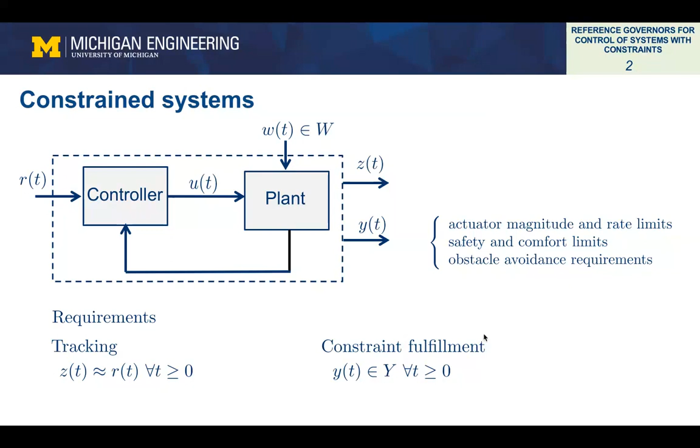Now, from the application standpoint, the importance of effectively dealing with constraints is increasing. This happens for a number of reasons. First, many systems are downsized. For instance, recent trends have been that engine displacement volume in passenger cars has been decreasing. And there is also a larger number of missions currently involving smaller satellites, such as CubeSats.

Such downsized systems tend to operate closer to constraint boundaries and are more likely to violate constraints. Moreover, existing systems are increasingly pushed towards performance limits, so the same situation emerges.

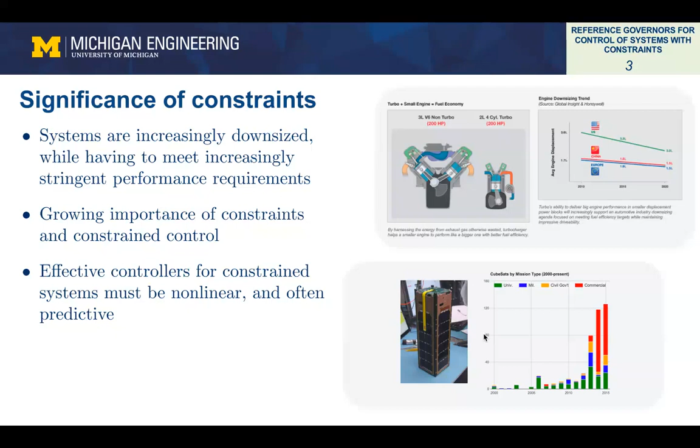To deal with constraints, effective controllers must be nonlinear and often predictive. In fact, a popular and effective technique for dealing with constraints involves the use of model predictive control. In MPC, you generate a feedback law by taking the first move of the optimal control sequence obtained as a solution to a constrained optimal control problem.

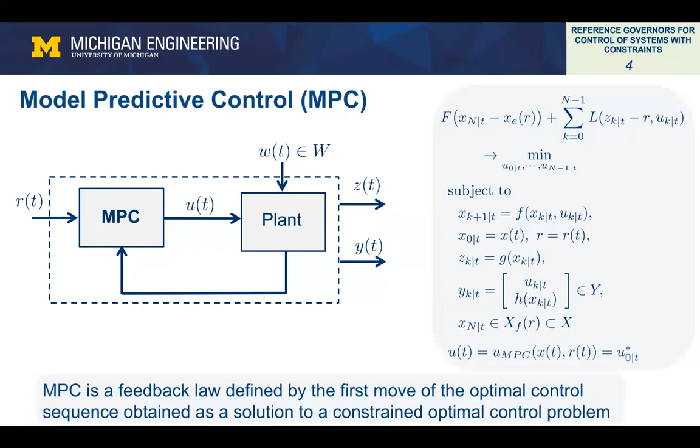The type of MPC problem you might pose is given here on a slide. And if you formulate it in an appropriate way, for example with terminal set constraints, you can guarantee that constraints will be satisfied for future times if they are satisfied at time 0.

Now here's a different type of situation where you already have a nominal controller designed, which provides satisfactory performance and does everything you want except handling the constraints. In such a case, you may not want to replace this nominal controller by an MPC controller, but you might augment it in some way to help it cope with constraint violations.

One such scheme for augmenting the nominal controller is the reference governor. What the reference governor does is look at a command provided to the system, and modifies it if necessary to avoid constraint violation. So this device remains inactive: the output of the reference governor, V of t, is equal to the set point if there is no danger of constraint violation. And if there is a danger of constraint violation, it will try to minimally modify the command that is fed to the nominally designed closed-loop system.

One property such schemes should have is that they should be easy to implement and have a fairly low computational footprint.

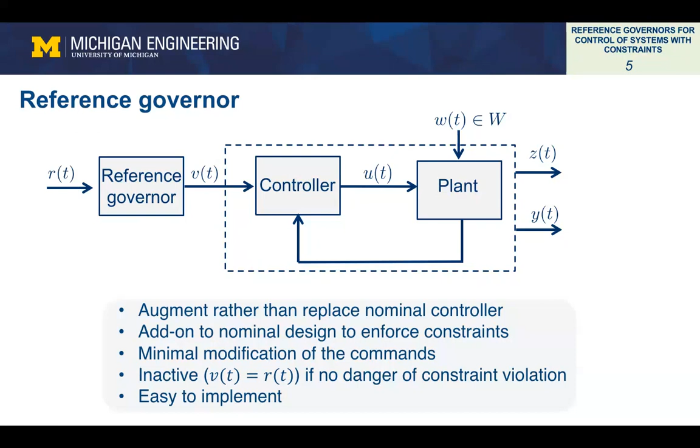Before I describe how we construct reference governors, let me show by example what they actually do. This is an example of a double integrator converted to discrete time, with constraints on position, velocity, and acceleration, which is the control input in this case. The nominal controller is of proportional plus derivative type.

If you now replace the command by the output of the reference governor, and as we will see shortly, the reference governor is a feedback law that depends on the previous value of its output and on the state, then this is what happens.

The step command, which goes to 0.5, is replaced by a gradually changing command. This dashed black line is the output of the reference governor, and it builds up slowly towards the reference. The effect it has on the system is that it slows down the system response, as shown by the blue solid line, as compared to the red dotted line, which is the original response without the reference governor. But as an outcome of this slowdown, the constraints on velocity and on the control input are strictly enforced.

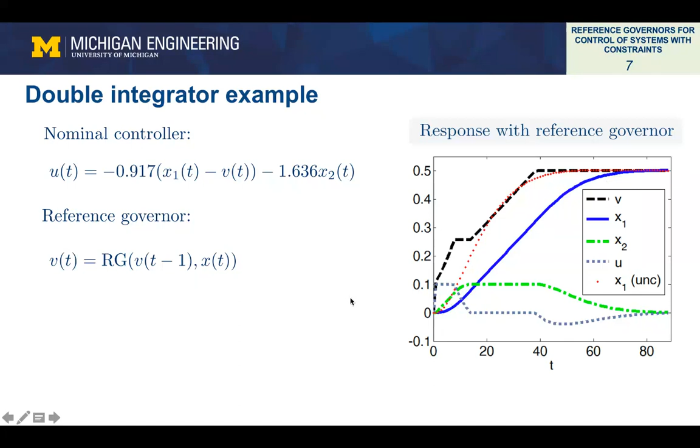Here's another, a little more complicated example. This is a single degree of freedom spacecraft with a flexible appendage, and we are interested in changing the orientation of the spacecraft without causing too large deflections of the appendage. The constraints here are on appendage deflection, basically the modal coordinate of the first mode, as well as on actuation input. The nominal control here is proportional plus derivative feedback on the orientation.

Now here's the response with the reference governor. What you can see is that the reference governor changes the steps to the dashed red lines, so the command is slowed down and constraints are strictly enforced. As you can see, the amount of slowdown depends basically on the reference size—for larger references, we have to slow down the reference more to be able to cope with constraints.

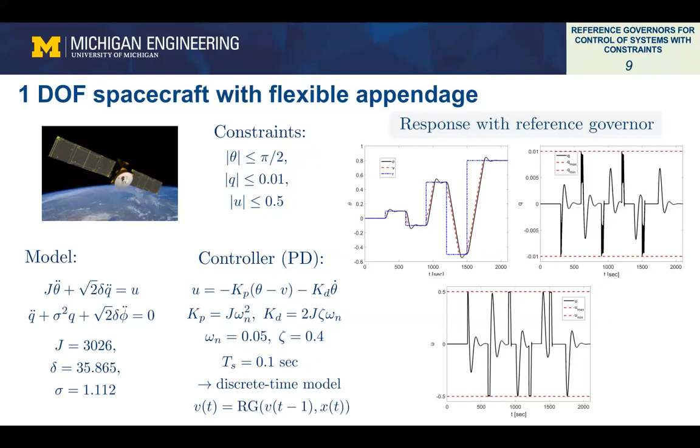Okay, so now as you can see what the reference governor does, the question is how does it do it? The basic idea is fairly simple: you compute the reference command, or modified reference command, so that if constantly applied, it would not lead to constraint violation.

Here's an example of a system with a static gain of 1, to which we apply a step input command. The constraint here is chosen so that the set point is exactly on the constraint boundary. As you can see, the output tracks the set point, but because of the overshoot, it violates the imposed constraint. So what the reference governor might do is scale down this reference and apply a smaller command, just enough to avoid violating the constraint due to the overshoot.

Now, this satisfies constraints, but of course it does not reach our target set point. So what happens is that at a future time instant - you can implement the reference governor in discrete time, so this corresponds to a future sampling time instant - you look at your current state and find a way to advance the reference a little bit more towards your original command without violating the imposed constraint. You repeat this process at future time instants, gradually building up the reference towards your original command without violating constraints. So this is the basic idea.

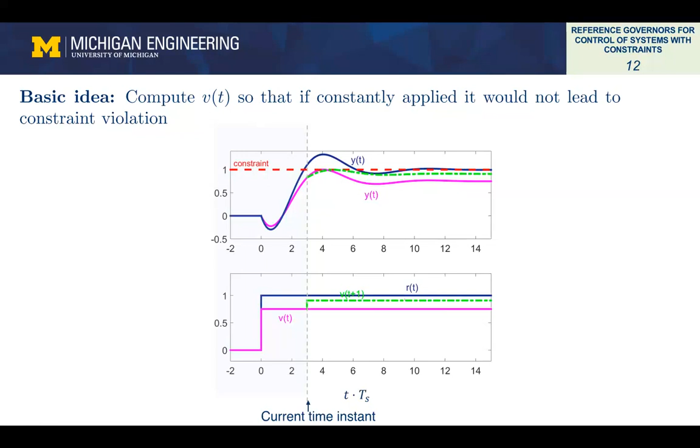Now how do we do this a little bit more formally, and how does it look in terms of equations? The key artifact in constructing the reference governor is the safe set. The safe set can be defined for continuous time systems, it can also be defined for discrete time systems, and it can be defined for systems that are linear or nonlinear. Here is an example where we define the safe set for a nonlinear discrete time system.

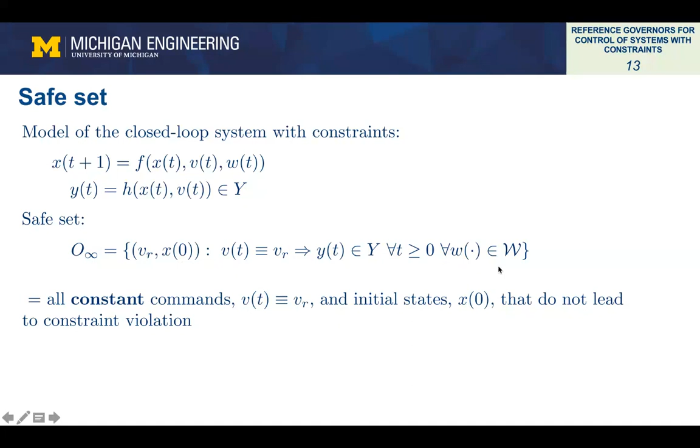It's really the set of all constant commands and initial states such that if we apply the command and start with this initial state, the subsequent response, the output, satisfies the constraints for all future times. And if your system happens to have parametric uncertainties and disturbances, then this property must hold for all parameter uncertainties and disturbances, also satisfying suitable conditions.

All right, so here's how the simplest so-called scalar reference governor is defined. It's defined by the solution of an optimization problem where you try to maximize kappa, subject to a couple of constraints. You can view the reference governor as given by this equation in two ways.

You can view it as a linear filter with an adjustable bandwidth parameter kappa, where kappa is between 0 and 1. You can also view it as an interpolation between the previous value of the output, v of t minus 1, and the current value of the command. So if kappa equals 1, then v of t equals r of t, and you pass the command to the system unfiltered. And if kappa equals 0, then the reference governor holds its output at a constant value, which is essentially an extreme constraint-avoiding action.

So what you try to do is choose this kappa as large as possible, so that v of t is as close as possible to r of t, subject to the constraint that kappa is between 0 and 1, and the pair consisting of updated command v of t and x of t is safe. By safety here, we require that it belongs to a set P, and that set P is a subset of O infinity.

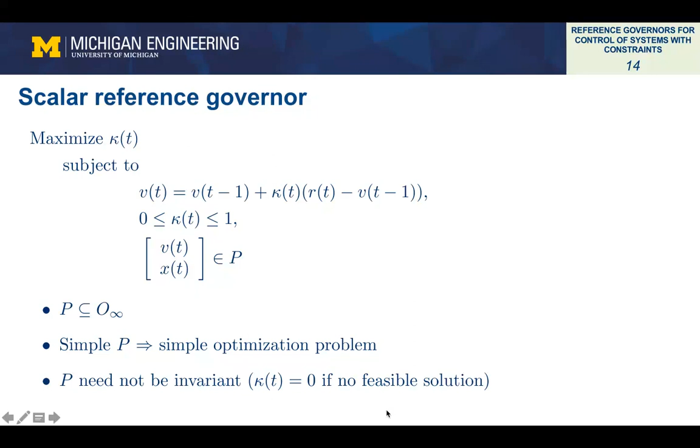So how do you obtain P? There are a number of offline procedures available. In the simplest case, if your model happens to be linear and constraints happen to be affine, then the set P is typically a polytope, and it's something that's fairly easy to compute.

Additionally, there are various procedures available for redundant and almost redundant constraint elimination that allow you to systematically simplify representation for this set P and lower computational complexity of the reference governor.

Now, if you happen to work with a nonlinear system, or with a linear system, and you have a Lyapunov function or ISS Lyapunov function for the closed-loop system, then you can use constraint admissible sublevel sets of such functions for your set P and for your reference governor implementation.

Next, if you happen to have a simulation model or experimental system, the only thing you can basically do is simulate or run an experiment, and you can do this for different commands and for different initial conditions. Then you can apply machine learning techniques to find a classifier that separates safe pairs of commands and initial conditions from unsafe pairs, and you can use a sublevel set of that classifier for your set P.

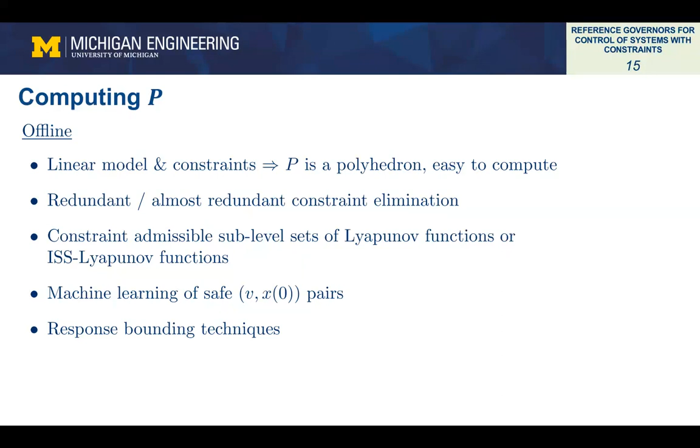Let me talk in a little bit more concrete detail about the simplest case, what happens when the model is linear and also the constraints are affine in the output. In this particular case, we are going to assume that the matrix A is Schur, so the system is stable, which is a reasonable assumption since typically the reference governor is applied to closed-loop systems.

Now, for such a system, it's very easy to predict the output response. Essentially, it's given by this compact expression. This is a state transition formula for linear systems adapted to the case when the command is constant, so it's just equal to v for all times.

What we can do now is define the set O-infinity-tilde as the set of all pairs of commands and initial states that satisfy these inequality conditions. Let me explain what they are.

If you go by row, this corresponds to the requirement that the output of the system satisfies the constraint. So the first row corresponds to the output at time 0. The second row corresponds to output at time 1. And you go all the way to a certain horizon T star. The last row is interesting because this is a requirement that the steady-state value of the output, that is the value at infinity, satisfies the constraints, and it has to satisfy the constraints strictly.

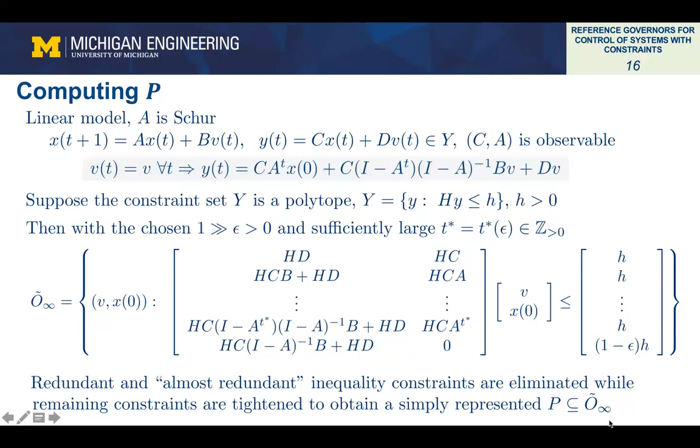Once you obtain O-infinity-tilde, you can eliminate redundant and almost redundant inequality constraints, while remaining constraints can be tightened to obtain a simply represented subset P of O-infinity-tilde that you can use in the implementation of the reference governor.

This is how O-infinity-tilde looks for our first double integrator example. The full set is three-dimensional, and what I show here are cross sections of the set by a constant V plane. So the meaning, for example, of the magenta set is that if I start anywhere in this set and apply a command of -0.5, then the ensuing trajectory will satisfy the constraints.

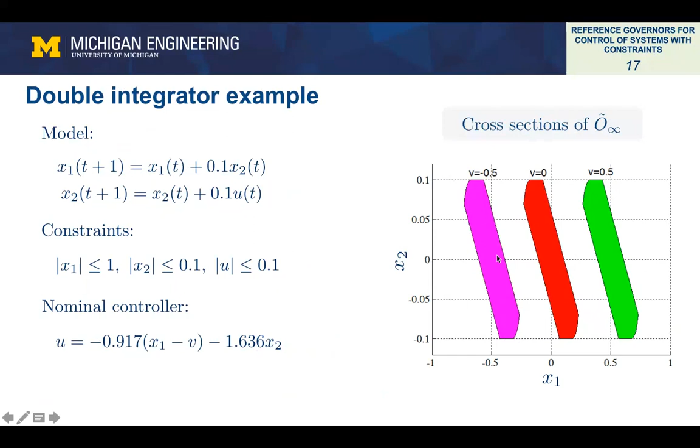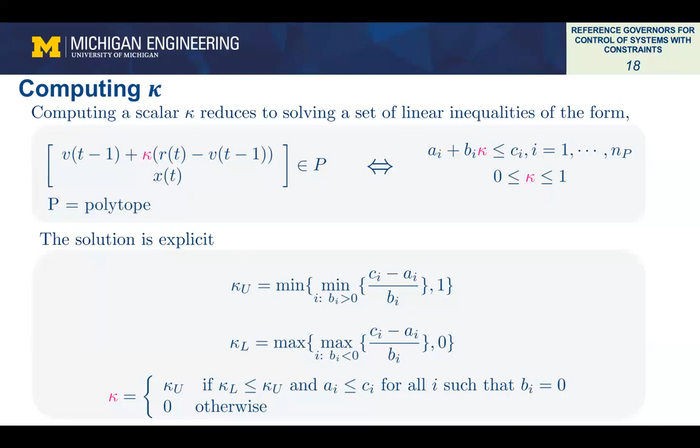So in the case when the set P is a polytope, the computation of kappa as a scalar parameter is very simple because essentially it reduces to solving a system of linear inequalities, and kappa is a scalar parameter between 0 and 1. It has to satisfy the family of these linear inequalities, and the solution of this is trivial. In fact, in most cases, kappa is equal to kappa-u, which is given by this explicit formula. So you can estimate, for example, the number of flops such computations can take, and the implementation of this can be done in a very simple way.

Now, this slide illustrates the impact of almost redundant constraint elimination on the computational complexity. This example is for a practical system. It's a fuel cell with about 10 states. So O infinity tilde here is in 11-dimensional space.

Here's what we do when we eliminate almost redundant constraints. If you look at O infinity tilde, shown here by the solid black line, what we often find is that many faces are very similar, so the normals are pretty much close to being the same. In such a case, we can eliminate some of the inequalities in the definition of O infinity tilde that are almost redundant, and by doing so, we obtain a slightly larger set, shown here by the magenta dashed line.

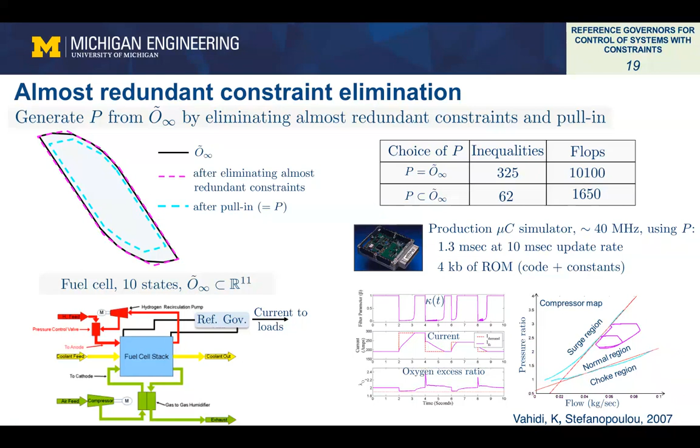What we can do next is pull in this magenta set to get a light blue set, which is strictly inside O infinity tilde. After this pull-in, we can use the resulting set as our P in implementation of the reference governor. As experience with several case studies shows, including for the fuel cell, the number of flops at each time step that you need to use can be reduced by an order of magnitude, with reasonable degradation in performance of the reference governor.

Okay, so this begs the question: how general can the sets P be used in a reference governor implementation, especially if you start looking also at nonlinear systems? It turns out the sets can be quite general. They basically have to satisfy two properties: the first property is safety, and the second property is strong returnability.

Safety means that if you start in a set, then the ensuing trajectories will satisfy the constraints for all future times. The property of strong returnability means that trajectories that start in a set may leave the set, but they must eventually enter the interior of the set. So we do not require the invariance of such sets, but we do require strong returnability of the sets.

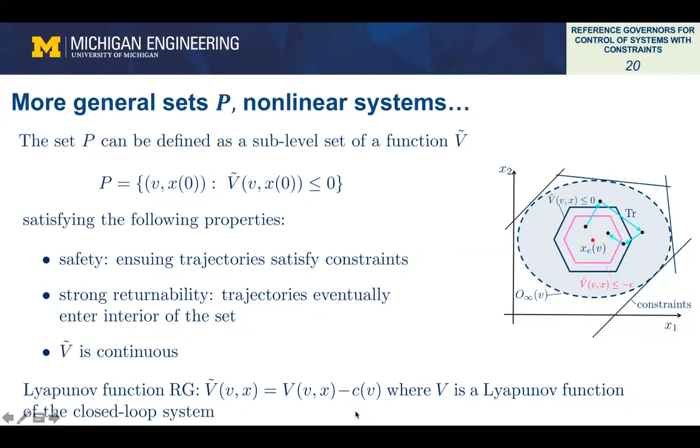It's also helpful when the set P can be written as a sub-level set of a certain function V tilde, which is continuous. You can certainly do this in the case when the set P is a polytope, and in other cases, for instance when you have a Lyapunov function, an easy way to generate this function V tilde is to essentially scale it by an appropriate amount so that it fits inside O infinity.

This is the reference governor that uses a functional description of the set P in terms of this function V tilde. Again, it's a scalar optimization problem that you have to solve, subject to the constraint that kappa is between 0 and 1, and that this function V tilde has to be less than or equal to 0. In some cases, the solution would be explicit. In other cases, you might have to do bisections on kappa to find the kappa that solves this optimization problem.

Now, for a number of technical reasons, there is a small modification that's needed. That is, you accept small increments in the reference governor output only if V tilde is less than or equal to minus epsilon. This is a technical condition, and it guarantees finite time convergence to constant steady-state admissible references that I'll talk about next. But it's needed for that reason.

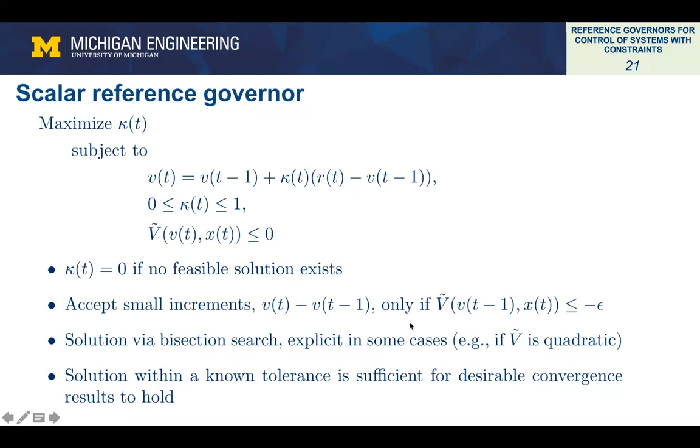Now, what if you don't want to compute this set P and you still want to implement the reference governor? Well, it turns out that you can implement it without computing P explicitly. What you can do instead is use online prediction over a sufficiently long horizon to determine if a given command and state pair is safe.

The advantage of this online approach is that the reference governor would be reconfigurable to model and constraint changes. So if your model changes online, you just use the new model for prediction. The drawback of this approach is that the constraint reduction techniques I have mentioned are not straightforward to use. Of course, it's possible to combine offline and online approaches together, that is, to pre-compute P or O infinity for part of the constraints, and then use simulations for the other part of the constraints that, for example, may be changing dynamically.

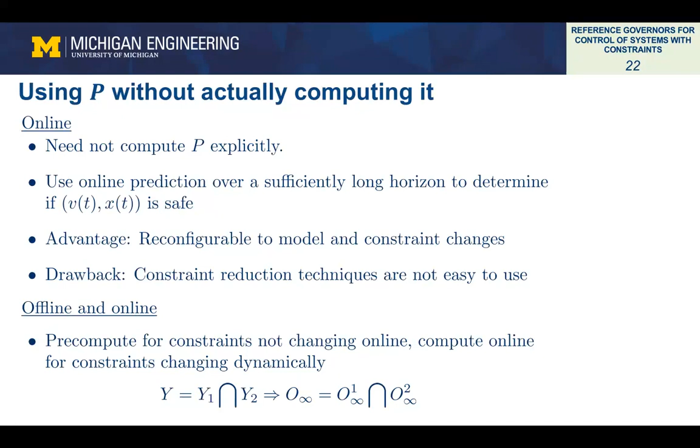Let me show some of the details for the response prediction based reference governor. Again, the ideas are simplest and the computations are easiest when the model is linear, because for a linear model, predicting the response to a constant command is pretty simple, given by the state transition formula adapted to the case of a constant command, and you can write it essentially as a linear function in kappa.

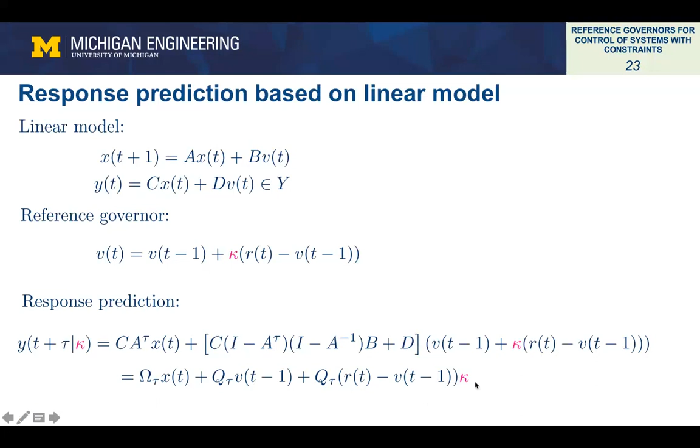This is an algorithm that applies to linear models, and constraints do not necessarily have to be linear in this case. They can be nonlinear, provided that the set Y is convex.

What you basically do is that at each time instant, you set kappa equal to 1, and tau here is the running time over the prediction horizon. You march along the prediction horizon and check whether the constraints are satisfied. If the constraints hold, you keep marching on.

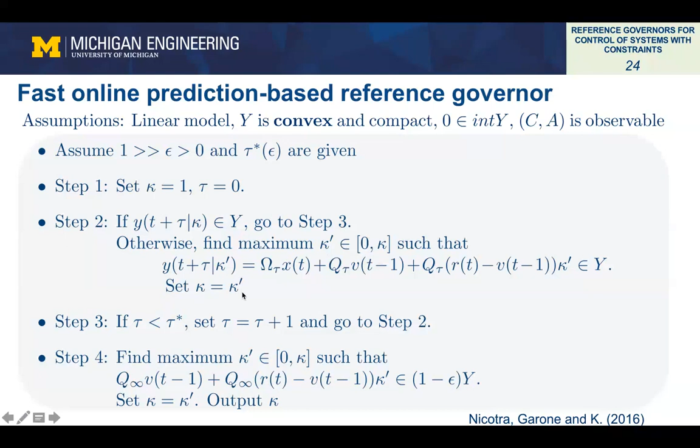If at some time instant you find that the constraint is violated, then you tighten kappa, so you find kappa prime in the interval between 0 and kappa, such that the constraints hold. Then you assign kappa equal to kappa prime, and continue this process till you reach the end of your prediction horizon. In typical case studies, the number of these kappa tightening steps, that is, where you do something else rather than just checking constraints, is actually very small over the prediction horizon.

This is an example of spacecraft relative motion control where constraints happen to be quadratic and linear. They are convex. As we control the motion of the spacecraft, on average we do two times of tightening kappa. At maximum, we do six times when the prediction horizon is equal to 50 steps here. So it's an effective approach.

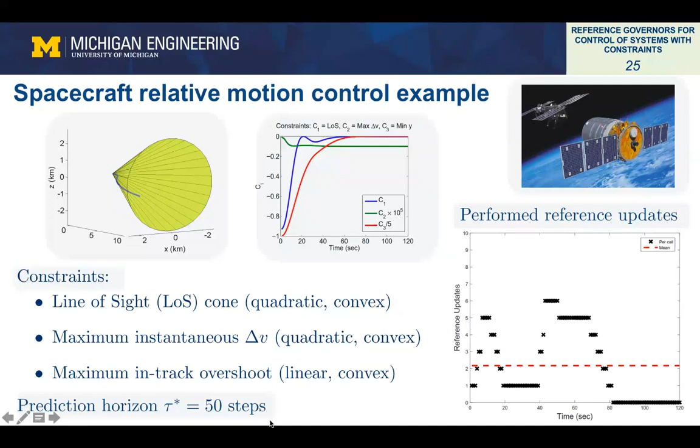Now that I've given you a flavor of how a reference governor is constructed and how it's functioning, let me tell you a little bit about existing theory, which summarizes several theoretical results available in the literature.

First, linear and nonlinear systems with set bounded disturbances and parameter uncertainties can be treated. Feasibility at initial time implies constraint adherence for all future times. This is a recursive feasibility property similar to the one in model predictive control.

The other property is the finite time convergence of the reference governor output to the command, or to the nearest steady state feasible value, provided that the command is constant. So for constant commands, we converge in finite time. It turns out that similar convergence results can be shown for nearly constant and slowly varying commands under suitable assumptions.

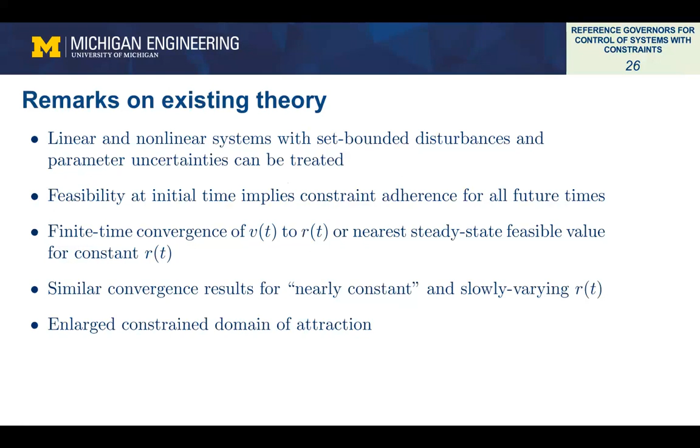Finally, such schemes provide an enlarged constrained domain of attraction compared, for instance, to feeding the command to the closed loop system directly.

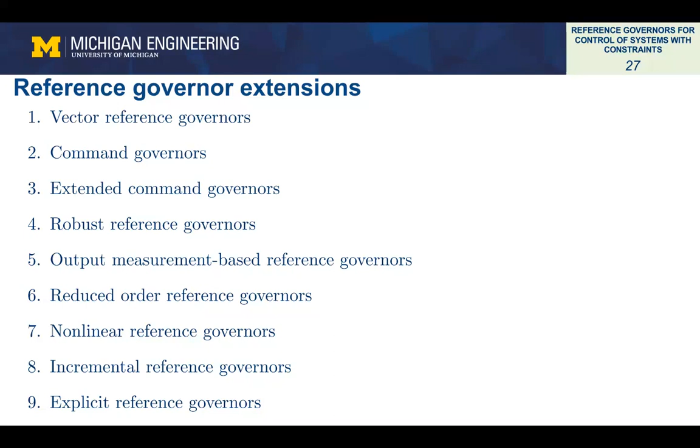Explicit reference governors are a very nice idea which do not use optimization at all. But they essentially use a feedback law design in continuous time, and by doing so, they guarantee traditional properties of the reference governors.

You can develop explicit reference governors for time delay systems. Reference governors can also be applied to systems where the delay may be random or there are data drops, and this is the case for network systems control over networks.

With some modifications, you can design reference governors for enforcing time-varying constraints. There is also a way to do distributed reference governors.

Inner loop reference governors use ideas from passivity in order to be able to place the reference governor not outside of the nominal feedback loop, but actually inside the feedback loop, and that sometimes is useful in applications.

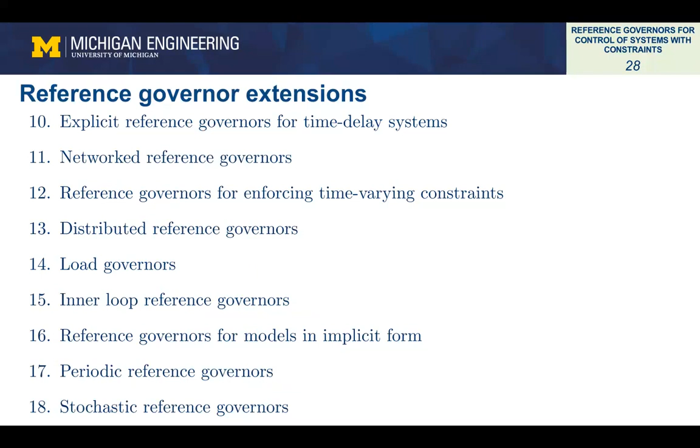You can design reference governors for models in implicit form, for periodic systems, and also for some classes of stochastic systems.

Those are reference governors, and why stop on just modifying the references? With the same idea of augmenting but not replacing, you can try to govern other parameters in the closed loop system, for example, gains of the controller, and that's what parameter governors do. Virtual state governors control the state in reference governors. They also reset the states, and it's also possible to combine a reference governor and MPC schemes.

If you'd like to read a little bit more about reference and command governors, both in terms of their theory and applications, my colleagues Emanuele Garone, Stefano Di Cairano, and myself, we have recently developed a survey paper in Automatica that is a survey and also a tutorial paper that goes into details on some of these more advanced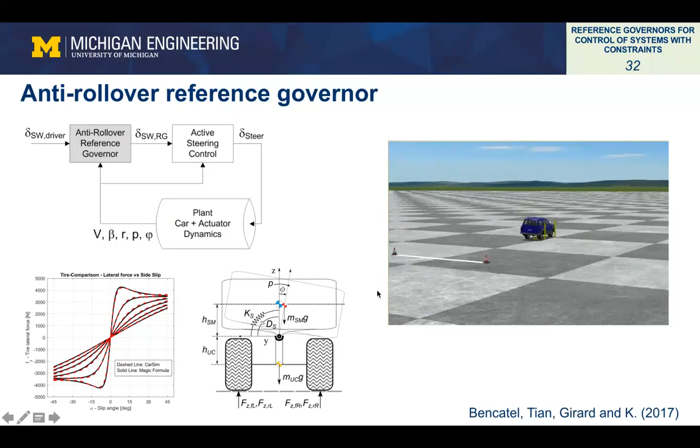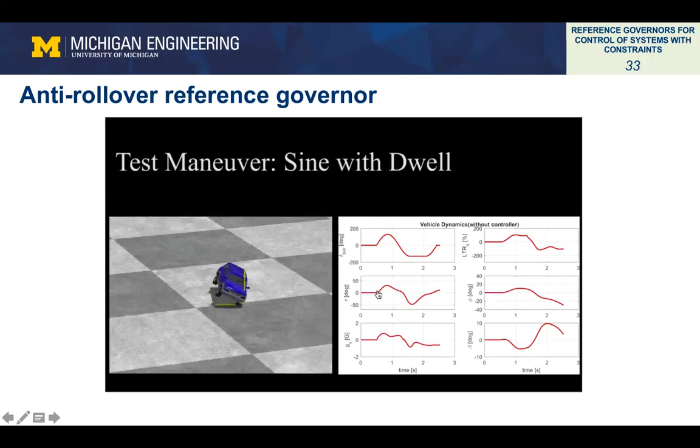Here's a short movie that my colleagues and I have come up with that illustrates the operation of the reference governor. This is based on CarSim simulations on a nonlinear model, and without the reference governor, the vehicle rolls over. Now with the reference governor, we are able to avoid the vehicle from rolling over in this nonlinear simulation.

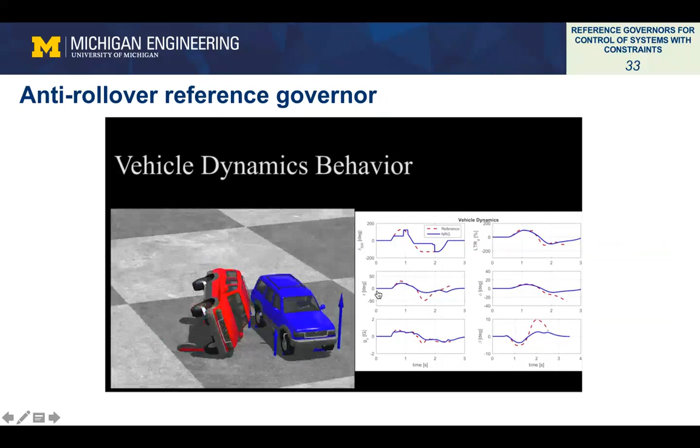I should also point out that if you look at the vehicle trajectory on the XY plane, the modification of trajectory is fairly minimal, but the rollover is avoided.

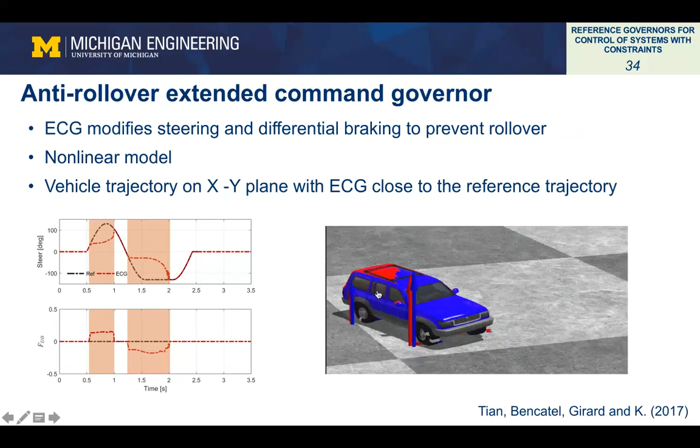You can extend this idea to coordinated use of active steering and differential braking. In this case, the reference governor is not flexible enough to handle the differential braking, and the extended command governor provides a good solution in this case, which we've also developed fairly recently.

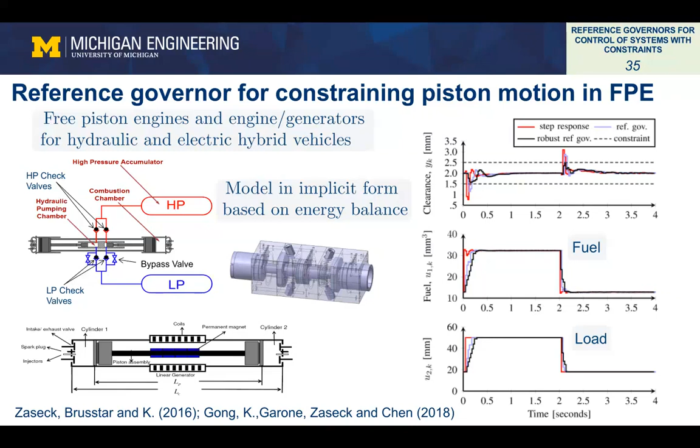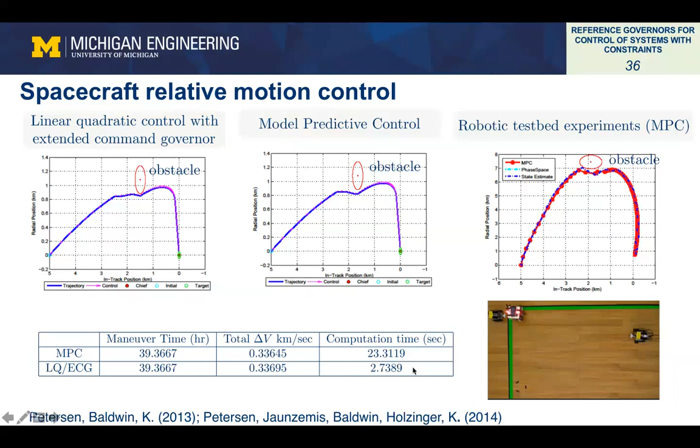the target without violating this constraint. We developed both model predictive control solutions and LQ plus extended command governor solutions. At least in our implementation, the ECG-based implementation was faster, and the trajectories that we obtained were fairly similar.

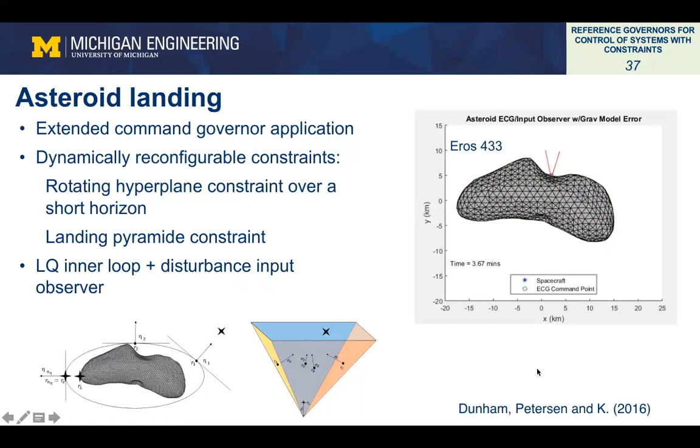Then near landing, we impose a pyramid constraint, and this is done on top of an LQ inner loop controller plus a disturbance input observer to compensate for uncertainty in the gravitational field of the asteroid. In nonlinear simulations, we are able to accomplish this type of landing. So hopefully this gives some ideas about a range of recent, practically oriented case studies that we have done.

I'd like to mention a few recent ideas that we looked at, more on the theoretical side, even though strongly motivated by applications. One of these ideas is the control state and reference governor. One observation we have made is that often the nominal controller in our system is not static, but actually dynamic.

For instance, it may include integral action and integrator states. Now, unlike the plant states, the controller states are under our control, so in particular we can reset them if we like.

This idea of resetting the controller states has previously been used to increase the speed of convergence during stabilization. Essentially, you use controller state reset to dump the closed loop energy. But in our case, we use this reset mechanism of the controller states in order to enforce the constraints.

Now, with controller state reset, the problem is more complex than the one of just a scalar reference governor. You have to solve an appropriately formulated quadratic program subject to the same type of constraints in order to determine both the command and the integrator state.

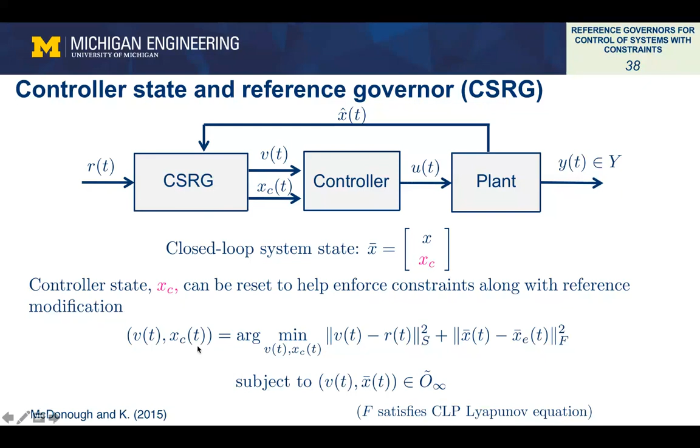What's interesting is that in some examples we find that this controller state and reference governor idea can be quite interesting and effective. For instance, if you look at sets of recoverable states for, say, a gas turbine engine, this is based on a second order model where the faster dynamics have been removed, so we just have the speed dynamics in the model.

But nevertheless, if I look at the sets of recoverable states that can be recovered by the controller state and reference governor, that is, I can start at any of these states and without violating the constraints continue to operate, then this set can be enlarged quite a bit by including the ability to reset the integrator state in this particular example.

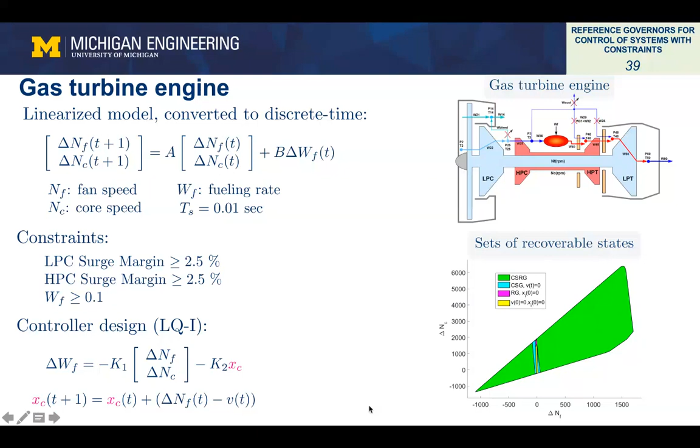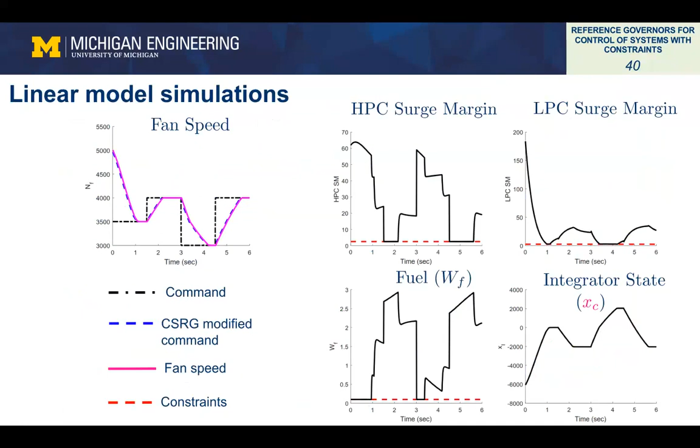And what we've done a little bit more recently is to incorporate the ideas of CSRG into an envelope-aware flight management system for the aircraft.

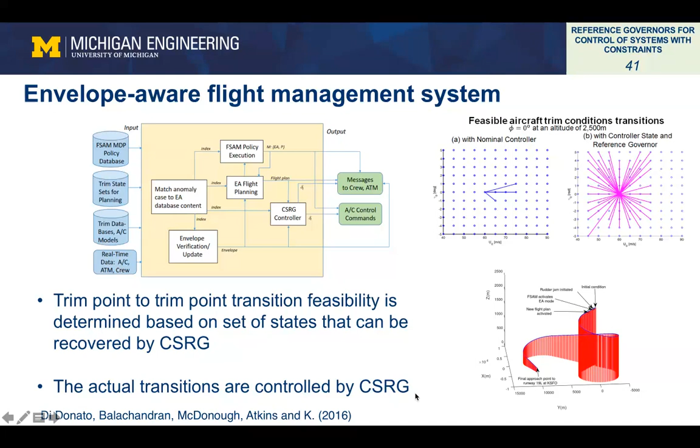Here is another development where we try to generalize reference governor to the case of systems with chance constraints, so this is a stochastic setting. The motivation came from practical applications to aircraft and also to flying wind turbines used for energy generation. Such systems operate in wind environments, so there is turbulence and wind gusts, and there are well-accepted models developed for this, such as the von Karman model and Dryden's model, which are stochastic. The basic setting, if you work with linearized models, is a linear discrete time system but with an additional stochastic disturbance input. You're trying to enforce constraints, for example on angle of attack or tether tensions in the case of a flying wind turbine.

In such a setting, it's not possible to satisfy constraints for all times, simply because the disturbance doesn't have compact support, so eventually constraints will be violated. What you can do instead is impose a chance constraint, requiring that the probability of the constraint violation over the prediction horizon satisfies the constraints with probability greater or equal than beta. Essentially, you require the measure of trajectories that violate the constraints to be sufficiently small. Another complication is that you cannot guarantee recursive feasibility with respect to even this chance constraint, because if the disturbance is large, it will push the state to very large values, and the constraint may no longer be feasible.

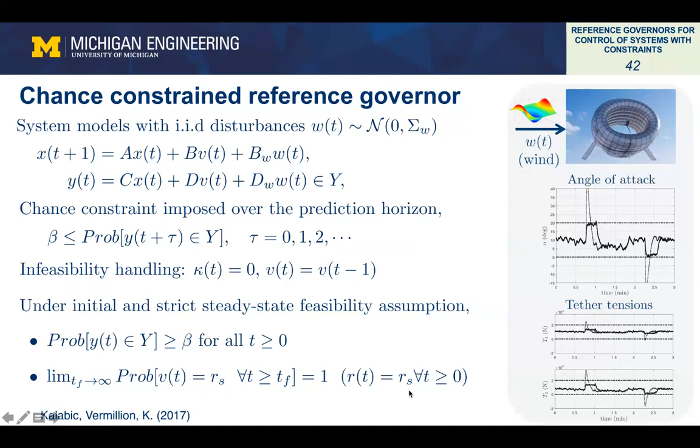So the infeasibility handling mechanism is very simple in the reference governor case: we simply set kappa equal to 0, which maintains the reference constant. So if we cannot satisfy our chance constraint, we do that. What we are able to show for the closed loop system with this infeasibility handling mechanism is that the probability of constraint satisfaction is greater or equal than beta for all future times, consistent with our design intent. Also, the probability of the reference governor output converging to our reference, in the case of constant references, in finite time is equal to 1. So essentially we recover the property of the deterministic reference governor in this case.

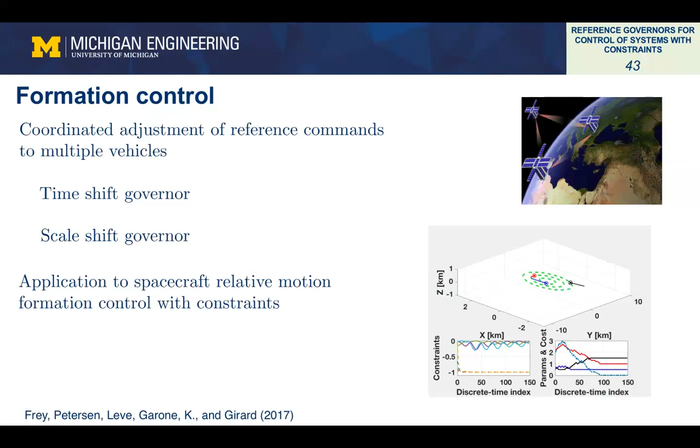This brings me to my last slide, where I'd like to make some concluding remarks on reference governor. The basic situation it addresses is when you have a nominal controller already designed, and you're pretty happy with it and don't want to redesign it, but you'd like to augment it with something that takes care of constraint violations. One such scheme is the reference governor. It augments rather than replaces the nominal controller, and that's what it does: it modifies the reference commands, and as I've shown, you could also modify other closed loop signals.

Finally, there are many opportunities for future research as well as applications of these ideas. One research topic involves fusing reference governors and adaptive systems, using reference governors on top of either adaptive or learning systems, as well as applications to very high order systems. It's an interesting research area. There are more discussions of additional research directions in our survey paper, and of course there are quite a few different opportunities for applications.